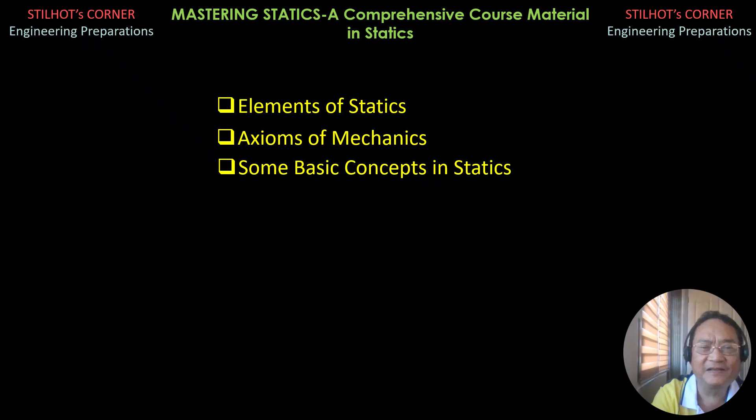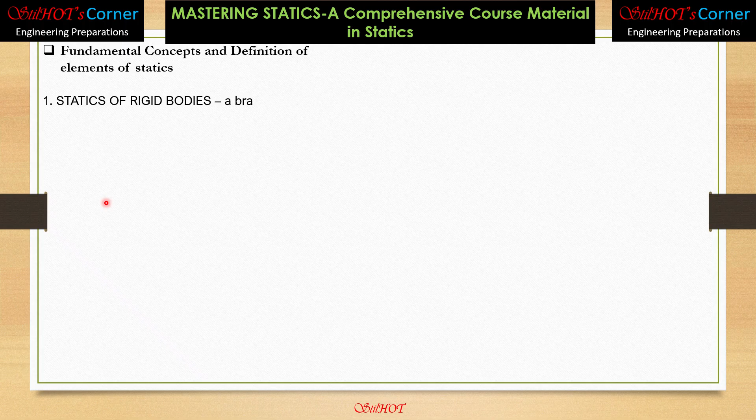Statics of rigid bodies is a branch of physics that deals with the study of forces and their effects on rigid bodies. A rigid body is a certain amount of matter, every element of which is fixed in position relative to the surrounding neighboring elements. That's the definition of a rigid body in statics.

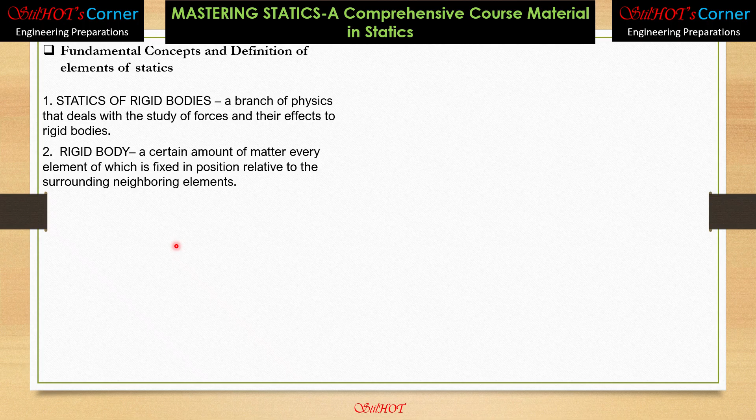When you say rigid, strictly all neighboring elements should be fixed in position relative to the surrounding neighboring elements. So strictly speaking, there's no such thing as a rigid body, but in statics, all bodies considered solids, as long as the resulting deformation due to the effects of forces is negligible compared to the size of the body, are considered rigid.

A particle is a certain amount of matter with considerable mass or weight, but of negligible size. You are considered a particle relative to your path. The car is considered a particle - a very small object compared to its path. The Earth, which revolves and traces its orbit, can be considered a particle relative to its orbit. That's the definition of a particle.

Mass is an absolute property of matter that determines its resistance to translational motion. That's the definition of mass. The greater the mass, the greater its resistance to motion.

Just consider a body of very small mass, and if you throw that mass upon a very large body of higher mass, then that body may move a little or it may not move at all, because the body has a very high mass.

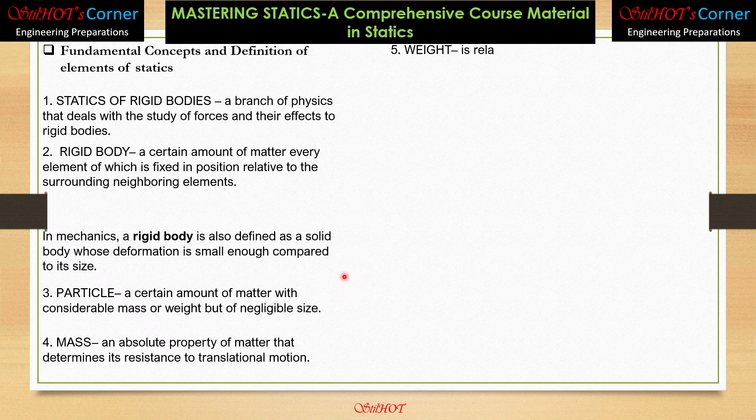Weight is related to the amount of force that acts on a body, either due to gravity or to a reaction force that holds it in place. That's the definition of weight.

Force is any interaction that tends to change the state of motion of a body. So if you apply a force to a certain object, and that force causes the body to move from rest, then we know that a force is applied. Even if the body does not move or remains at rest, as long as you apply a force, and there is reaction, it may be due to friction that holds the body to remain in equilibrium, so there is still a force.

A force may also be defined as the action or reaction transmitted by one body upon another body in contact with each other.

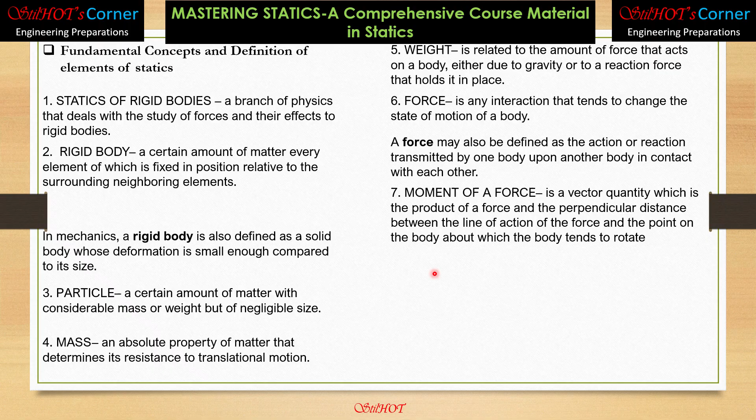Moment of a force is a vector quantity, which is the product of a force and the perpendicular distance between the line of action of the force and the point on the body about which rotation is possible, or rotation is possible to occur.

For instance, we have here a wrench, and you apply a force through your hand, directed in that direction with a magnitude of F. Then the perpendicular distance of that line of action of the force to the point about which rotation is possible, or tends to rotate about this point, which is a bolt - the amount of moment is simply the magnitude of the force and that perpendicular distance from the point where rotation is possible to the line of action of the force.

So this perpendicular distance to the force is called the moment arm, and the point on the body about which rotation is possible is called the moment center. We will call the moment arm D and the moment center O. It has sense - it is either clockwise or counterclockwise - but for this case, it is counterclockwise that is positive in statics.

When the force is applied, this moment arm D tends to rotate counterclockwise. So the sense of rotation of the force is the tendency of this moment arm to rotate about this point O, the moment center. If this moment arm tends to rotate counterclockwise, then the sense is counterclockwise. If it is clockwise, then it is clockwise also. So when force F is applied, this moment arm D tends to rotate counterclockwise, so the sense of moment is counterclockwise.

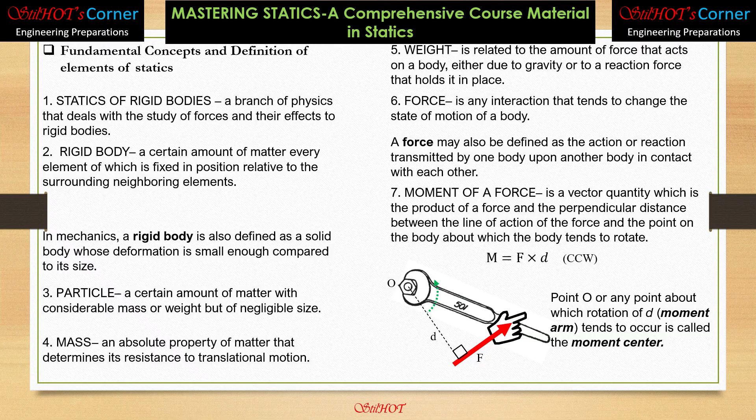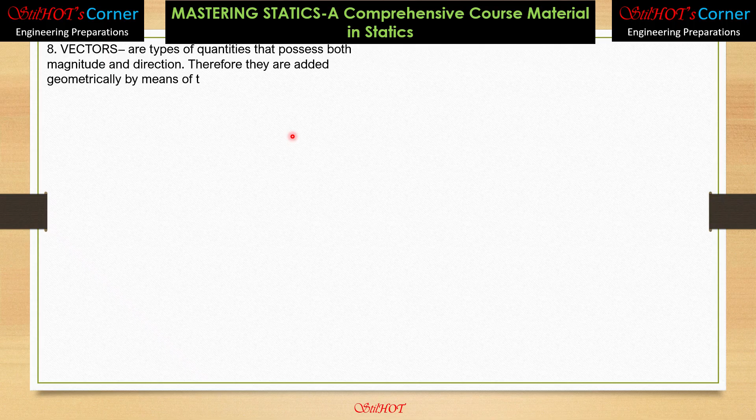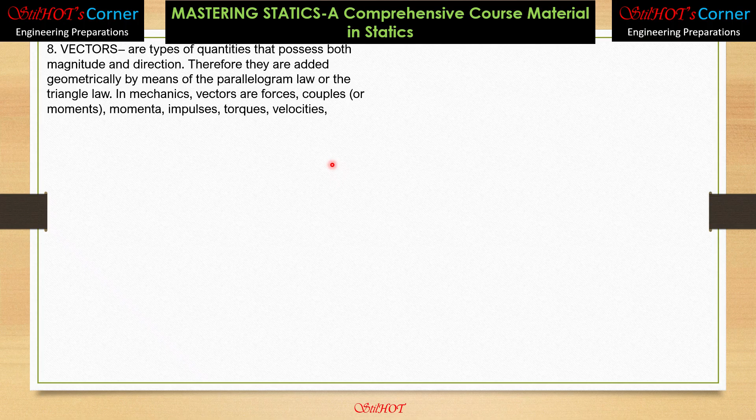Vectors are types of quantities that possess both magnitude and direction. Therefore, they are added geometrically by means of the parallelogram law or the triangle law. In mechanics, vectors are forces, couples or moments, momenta, impulses, torques, velocities, acceleration, and displacements.

Vectors may also be a fixed vector, where magnitude, direction, and point of application are fixed. A sliding vector has magnitude and direction, as well as line of action, fixed. And a free vector has neither point of application nor line of action fixed. So those are the definitions of vectors.

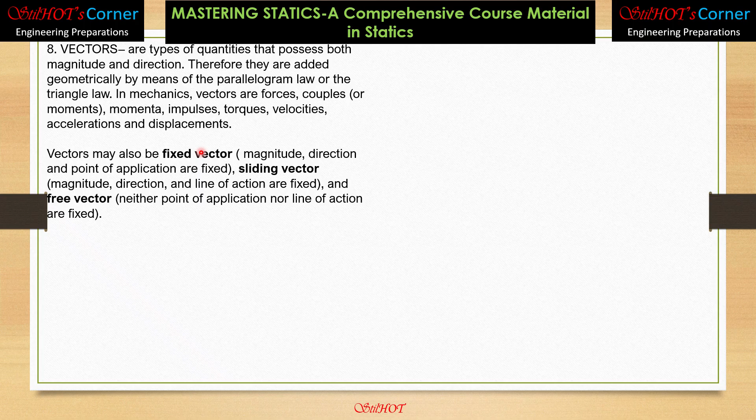Scalars are types of quantities that possess magnitude only, and therefore they can be added arithmetically. Examples of scalars are time, temperature, speed, distance, area, length, volume, energy, mass, and second moment of a mass, or the moment of inertia. All of these quantities can be added arithmetically.

So they are scalars. The resultant is the simplest force system that is equivalent to the original system, or equivalent to the effect of the original system. The simplest force system is called the resultant.

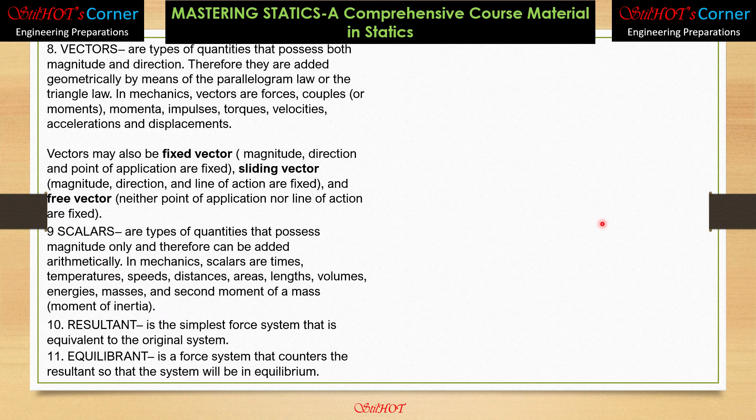The equilibrant is a force system that counters the resultant so that the system will be in equilibrium. So that's the definition of equilibrant.

Then, the characteristics of a force. The characteristics of a force are its magnitude, which may be in Newtons, kilonewtons, pounds, or dynes, its point of application, and its line of action. So those are the characteristics of a force.

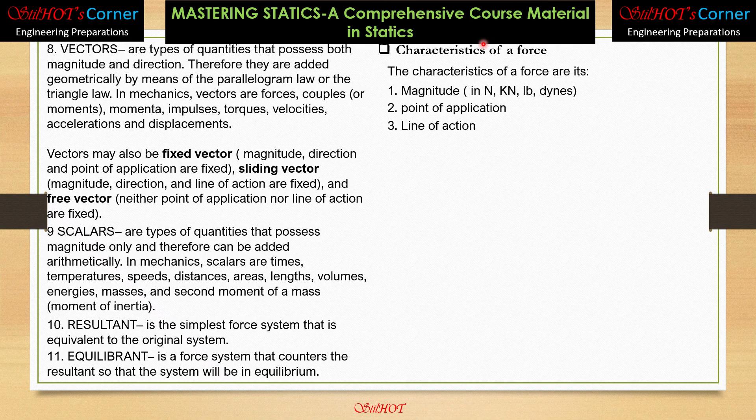The external effect of a force on a body is manifested by its tendency to change the state of motion of a body. So as before, if the body remains at rest due to its own weight and other acting forces, it means it is held in equilibrium by the reaction forces.

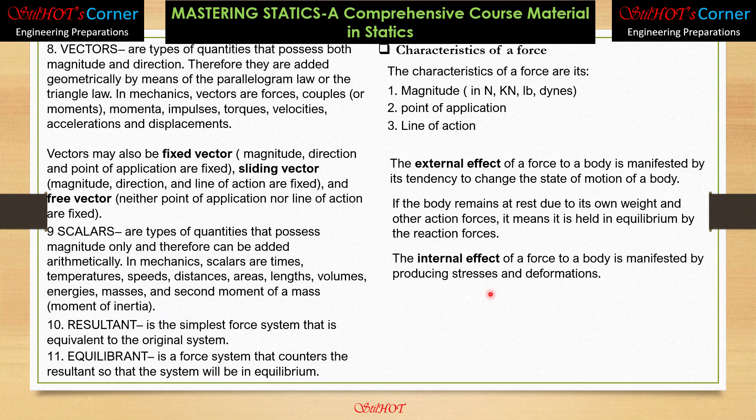The internal effect of a force on a body is manifested by producing stresses and deformations. These are not seen externally because we have to investigate the body internally, and we have to compute for these stresses and deformations.

Then let's proceed to axioms of mechanics. These are statements that are assumed to be correct without proof, and this must be based on your experience from your statics class.

The parallelogram law states that the resultant of two forces is the main diagonal of the parallelogram formed on the vectors of these two forces. So the resultant is the main diagonal formed on the vectors of the two forces. The main diagonal may not be the longest diagonal of a parallelogram.

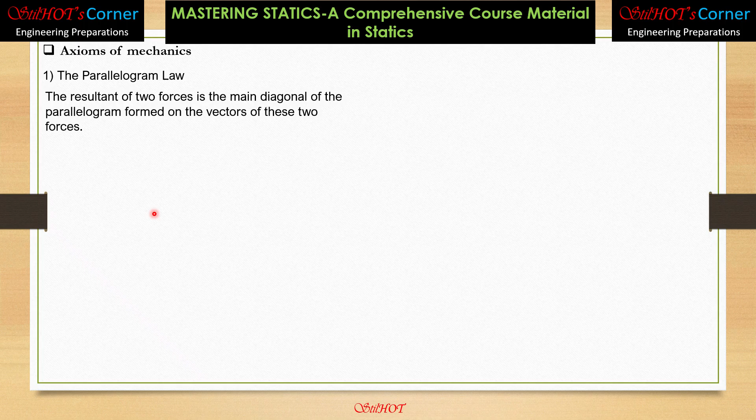All you have to do is arrange so that the main diagonal, or the resultant, is obtained by making a parallelogram. From the two forces, you draw a parallelogram. The main diagonal is defined as the diagonal drawn from the common tail of the two forces to the tips of the free vectors of the forces. So if this is F1 and that is F2, this is the common tail of the two forces. You draw lines parallel to these two forces to make a parallelogram. Then the main diagonal would be from this tail to the opposite corner of the parallelogram. So that's the resultant, and that is F1 plus F2.

Take note, these are vectors, boldface, so it's not simply F1 plus F2 arithmetically. This is to be computed geometrically by means of this parallelogram, or by means of this triangle. For the triangle, you draw the first force, then connect the second force. The order of the arrangement of forces is irrelevant, meaning it can be in any order.

So for example, if you begin with F2, then connect F1, the resultant is the diagonal, or the third vector, which is formed from the tail of F2 to the tip of the second force, which is F1.

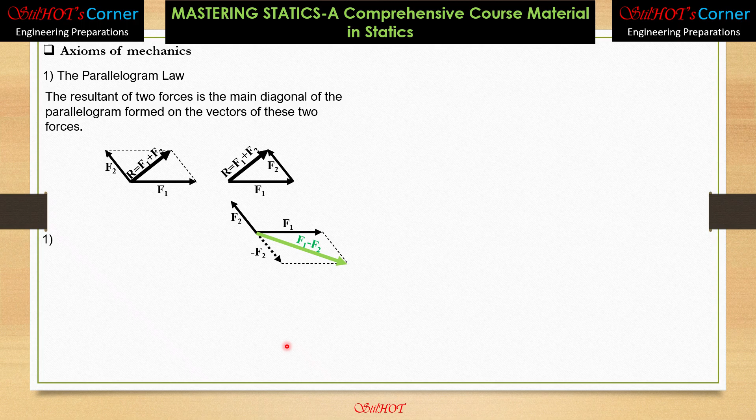The next axiom is two forces are in equilibrium when equal in magnitude, oppositely directed, and collinear in action. So take note that there are three conditions for two forces to be in equilibrium. They must be equal in magnitude, oppositely directed, and third, they must be collinear in action.

Or else, if they are not collinear in action, that constitutes a couple and the body will rotate.

So we have here an example. These two forces are in equilibrium because they are equal in magnitude, oppositely directed, and collinear in action. So another example, then the last one is this.

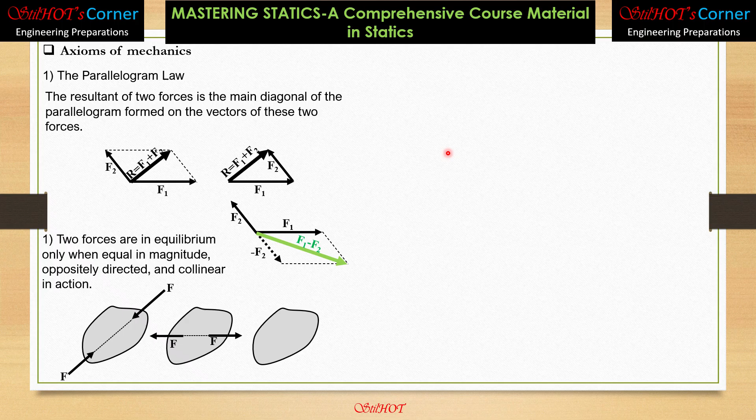So that forces may be removed out of the body because the two forces are in equilibrium. Because of that, any number of sets of equilibrium forces may be added to any force system without changing the external effect of the original system.

So remember here, in this third case, we remove the forces. You can also add them back as long as they are in equilibrium. In fact, you can add any number of pairs of equilibrium forces. The effect to the original body, to the original system, is the same.

So it may be free of forces that are in equilibrium, or it may have so many equilibrium forces applied. Anyway, you can remove those forces, pairs of forces that are in equilibrium.

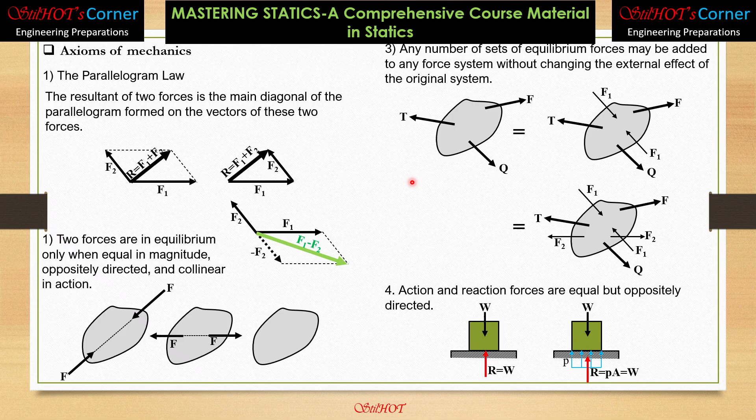So that's the fourth axiom of mechanics, and I hope that you recall all these axioms of mechanics because these are very important in the analysis of force systems.

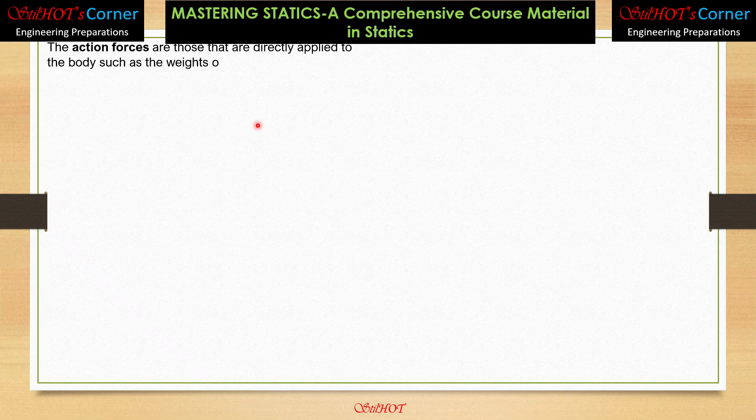So again, the action forces are those that are directly applied to the body, such as the weights of the members and equipment, and external loads caused by the occupants, people, and natural forces such as water pressure, wind, and earthquake. The reaction forces are those that are developed or transmitted forces at the contact points between two or more contacting bodies.

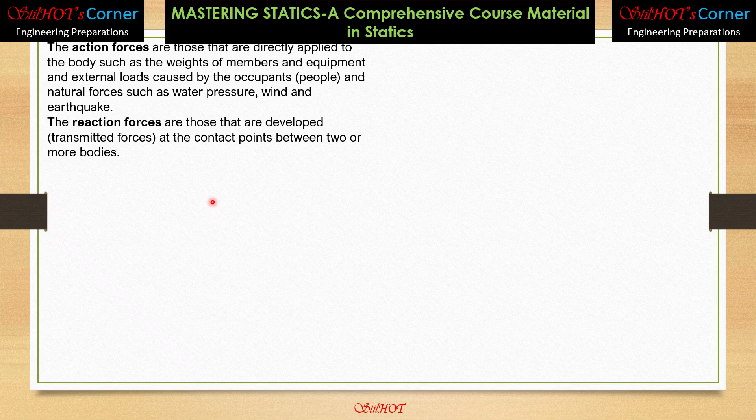So, for example, to demonstrate the action force in this system here that is in equilibrium, we have a bar, and the bar supports this cylindrical body. Let's assume first that this vertical surface is smooth.

Then we have a pin. A pin has two reaction components, horizontal and vertical, because the bar is free to rotate about A. Then we have a cable or rope that will produce tensile force. Then we have a smooth bar or strut. Then we have a smooth log or cylinder. So we also have a smooth wall surface.

So if we draw the free body diagram of this entire system, first we have to apply the action force, which is the weight, and the reaction forces. If we consider the entire system, then the reaction at D is external because this is an external wall surface.

So if you treat this as your body, then you can feel that you are compressed at D. So a compression force is pointing at the point of contact, or towards the body.

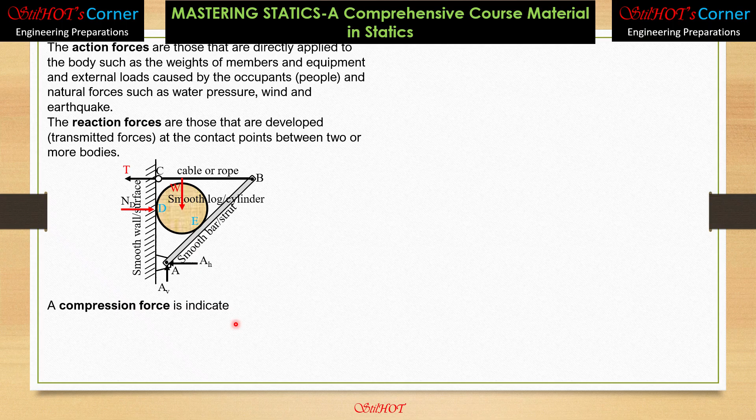Then of course we have the tension, which is away from the point of application. So to distinguish between compressive force and tensile force, a compressive force is indicated in the free body diagram as an arrow with the head pointing towards the point of application. So this is, for instance, a compressive force. We have a point, and it is directed towards the point of application.

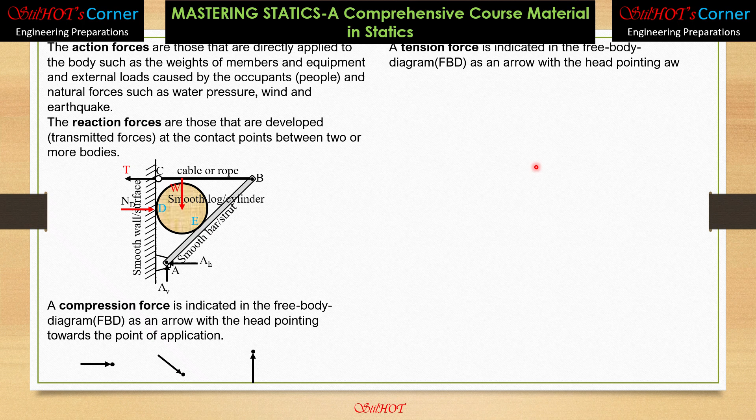A tension force, on the other hand, is indicated in the free body diagram as an arrow with the head pointing away from the point of application. For example, this is the point, so the tension force is away from the point of application.

The free body diagram, or FBD, is a portion of a body or the whole portion of contacting bodies, showing the action and reaction forces, and of course with the dimensions completely labeled, and the details needed for the complete analysis of that body or system.

So if we want to draw the free body diagram of the cylinder or that smooth log, first we have the action force, the weight, then we have the normal perpendicular reaction, or compressive reaction, at D as well as at E.

And at E, the reaction is also perpendicular to this smooth bar, the axis of the smooth bar, and it is pointing towards the point of contact because it is a compressive force. Now, as I said, you have to treat this body as your body so that you can feel if the reaction at the contact point is tension or compression. So it is compression definitely, and it is directed towards the center of the cylinder or log.

Then, if we draw the free body diagram of the bar, by the way, for the external reactions, the direction of the external reactions will not change. Only the internal reaction will change, from axiom number 4. So, because NE is an internal reaction, remember action and reaction forces are equal but oppositely directed.

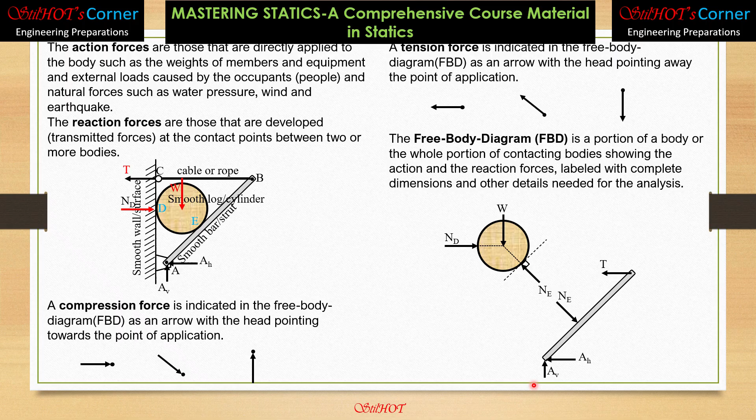So that's the free body diagram. What is missing here is, if the dimensions are given, then we also have to draw or label the dimensions.